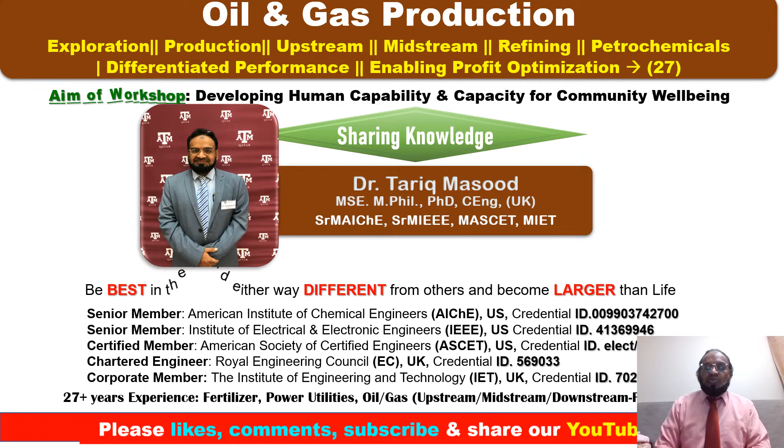Oil and gas production: introductions, facilities, process, reservoir and wellhead management system, upstream facilities, midstream, refining facilities, petrochemicals facilities. Now we are discussing utility systems, unconventional and conventional resources, and environmental effects.

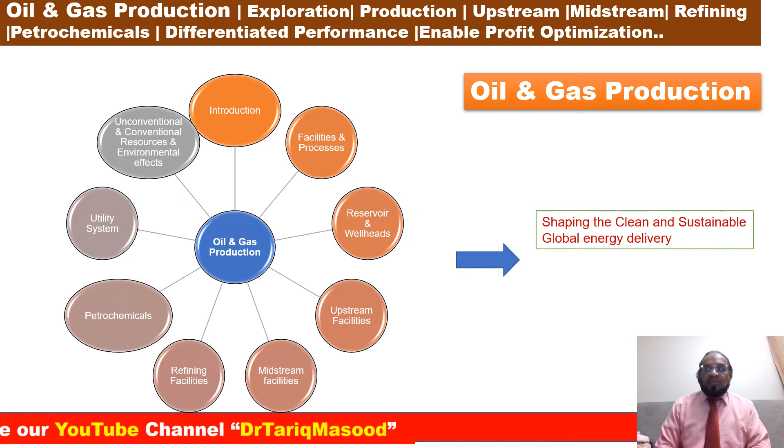What is the ultimate goal? Shaping clean and sustainable global energy. So we have a plan to deliver more than 300 lectures over the next couple of years.

Oil and gas production, downstream oil and gas process, lecture number 27: key takeaway points are aromatics, benzene and styrenic chains and its derivatives. We are going to discuss this today.

Benzene and styrenic chain derivatives. Principally, polystyrene is the solid plastic made from polymerized styrene. It is the second most common plastic and used in a wide variety of everyday applications, from coffee cups to CD jewel boxes. It is a thermoplastic polymer in a solid glossy state at room temperature, but flows if heated above 100 degrees C, and becomes solid again when cooled. This allows polystyrenes to be extruded, molded and vacuum formed in molds with fine details and high finish.

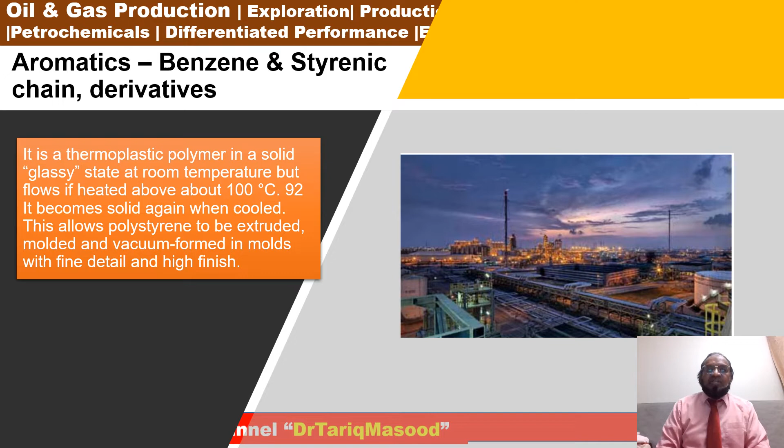Now we are going to discuss benzene and styrene chain structure. Here we see aromatic hydrocarbons, which produce three compounds: xylenes, toluenes and benzenes. The xylene further produces polyester chains, the toluene will produce polyurethane chains, and benzene will produce phenolic chains or nylon intermediate.

The styrenic chains will produce ethylene benzene and further styrene. Styrene will produce polystyrenes, styrene acrylonitriles, and acrylonitriles with butadiene styrenes. The ethylenes will combine with styrenes and butadienes to produce styrene butadiene rubber.

Styrene acrylonitrile, also known as SAN, is like polystyrene but offers high thermal resistance and is therefore used mainly in automotive, electrical and electronic industries, as well as household application building products.

Acrylonitrile butadiene styrene, ABS, is a tough, heat resistant and impact resistant thermoplastic, with the acrylonitrile providing heat resistance and the styrene units offering rigidity. It is widely used for appliance and telephone housing, luggage, sporting helmets, pipe fittings, and automotive parts.

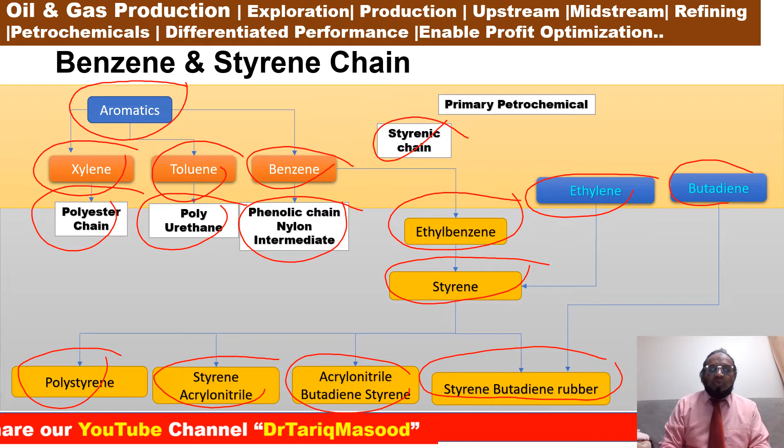Styrene-butadiene rubber (SBR) is rubber manufactured from styrene. Because of its excellent abrasion resistance, it is widely used in automobile and truck tires, as well as for carpet backing and paper coating. About 50% of a car tire is made from SBR, styrene-butadiene rubber. Other applications are in belting, flooring, wires and cable insulation, and footwear, etc.

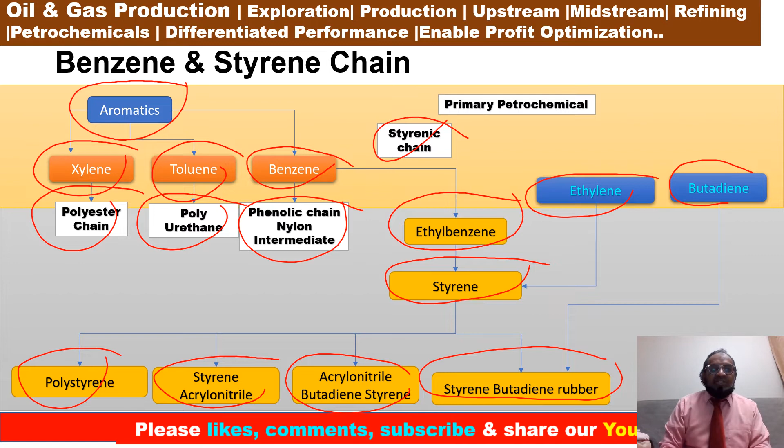Olefins are petrochemical derivatives produced by cracking a feedstock from raw materials such as natural gas and crude oil. Lower olefins have short chains with only 2, 3 or 4 carbon atoms, and the simplest one is ethylene. Higher olefins have chains of up to 20 or more carbon atoms. The main olefin products are ethylene, propylene, butadiene and C4 derivatives. They are used to produce plastics, as chemical intermediates, and in some cases as industrial solvents.

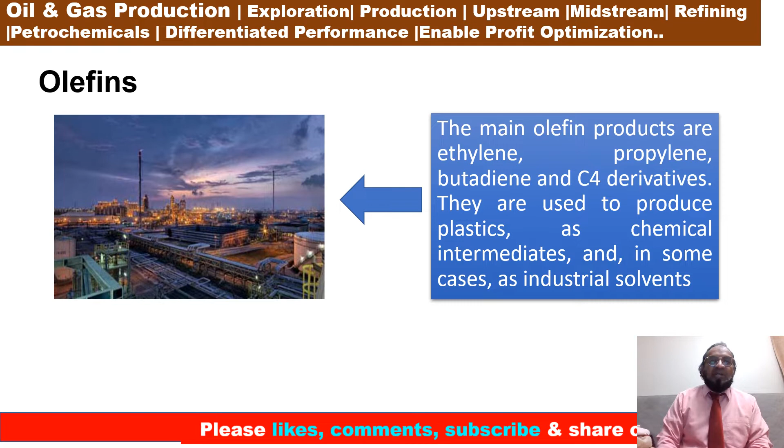Now we're going to discuss ethylene derivatives. These olefins will produce ethylenes, propylenes, butadienes, butylenes, and pygas.

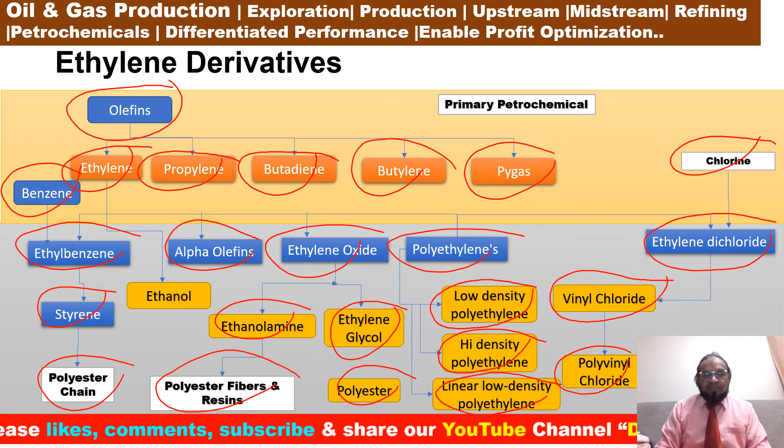So the first is high density polyethylene (HDPE), low density polyethylene (LDPE), linear low density polyethylene (LLDPE), and polyvinyl chloride (PVC). High density polyethylene, HDPE, is used predominantly in the manufacturing of blow molded bottles for milk and household cleaners, and injection molded pails, bottle caps, appliance housing, and toys, etc.

Low density polyethylene, LDPE, is used in film applications due to its toughness, flexibility, and relative transparency. Typically, LDPE is used to manufacture flexible films such as those used for plastic retail bags. LDPE is also used for flexible lids and bottles, and in wire and cable applications for its stable electrical properties and processing characteristics.

Number three, linear low density polyethylene, LLDPE. LLDPE is used predominantly in film applications due to its toughness, flexibility, and relative transparency. LLDPE is a preferred resin for injection molding because of its superior toughness.

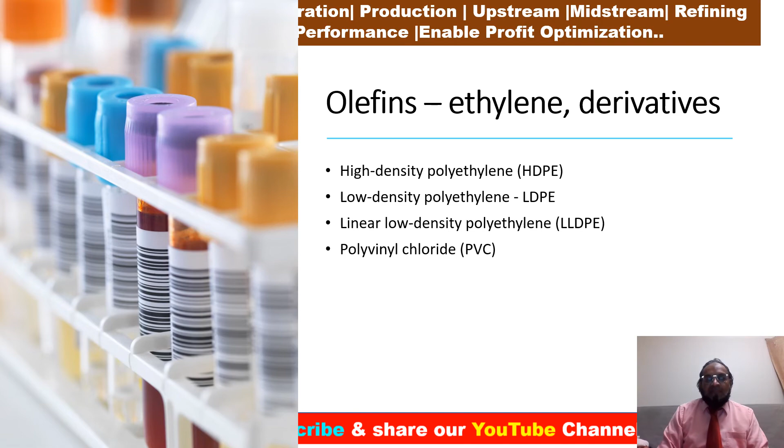Conclusion: we have discussed aromatics, the benzene and styrene chain, ethylene derivatives, and olefins ethylene derivatives.

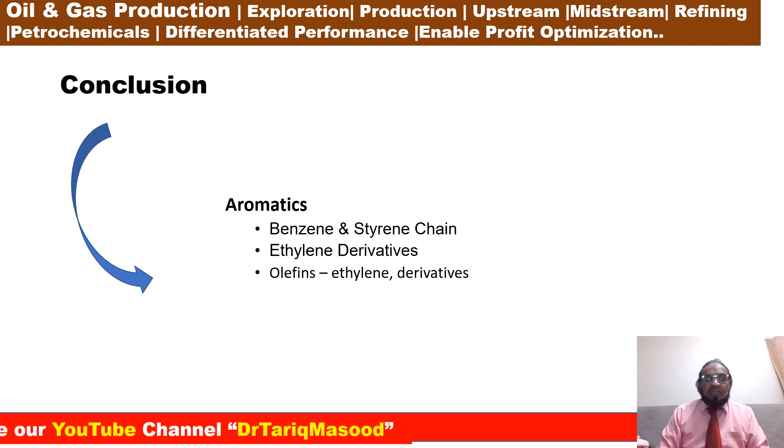Next topic, oil and gas production. We are going to discuss propylene derivatives.